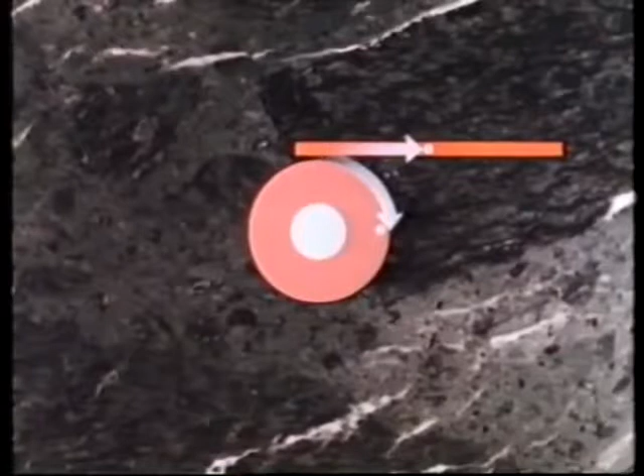Now, if the roller were allowed to move across the floor as the beam were pushed, the point marked on the beam would travel further in a left to right direction than before, by as much as the roller moved in the same direction.

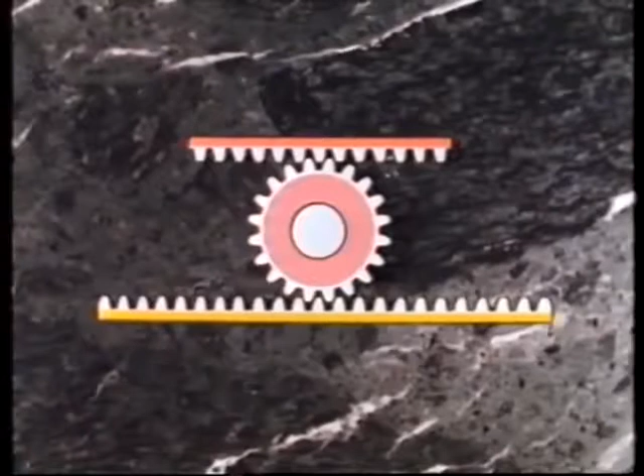As a first step in making this knowledge work for us, let us give the floor, the roller and the beam teeth to prevent them slipping. If this simple machine is then made to operate in a circle, we have the basis for a usable system of gears.

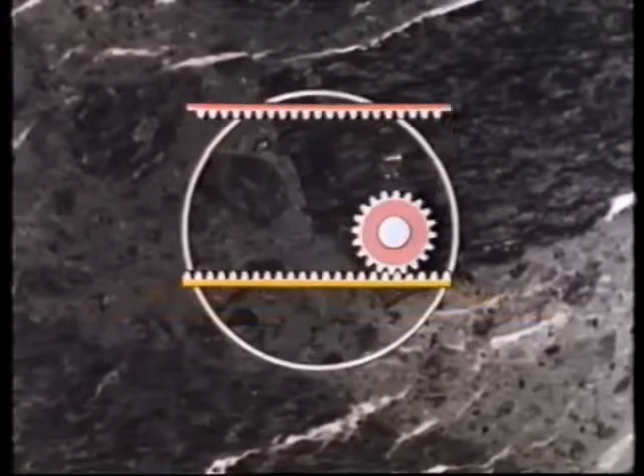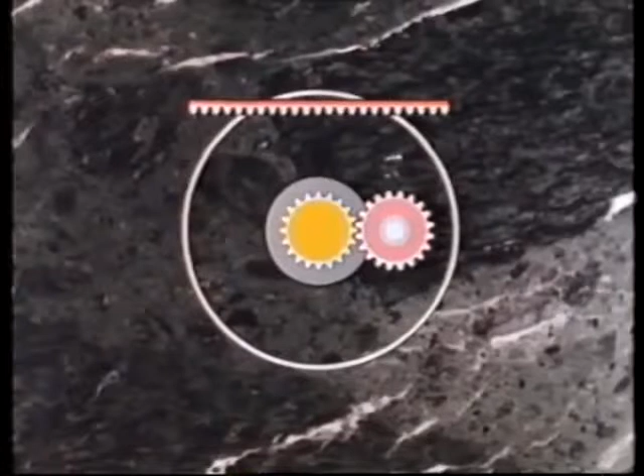We must start by naming the components of this system. The fixed floor has now become a fixed pinion, the sun pinion. Revolving round it, the roller becomes a planet pinion. It still has a pin through it which is fixed to and rotates with the planet cage. Finally, the beam becomes the gear ring.

If we apply power to the planet cage and move it through 90 degrees, the additional rotation of the planet pinion causes the gear ring to move further, in this instance an extra 30 degrees, making a total of 120 degrees. Conversely, if the gear ring is rotated 120 degrees, the planet cage moves the planet pinion through 90 degrees. In other words, our simple system of gears gives the ratio 120 to 90, or 4 to 3.

The Sturmey-Archer system applies this basic principle in a bicycle hub. Power is introduced via a sprocket, revolved of course by the chain. If the sprocket could be made to turn the planet cage, and the gear ring were connected to the hub, we would have high gear selected, with the hub rotating 4 times for every 3 rotations of the sprocket.

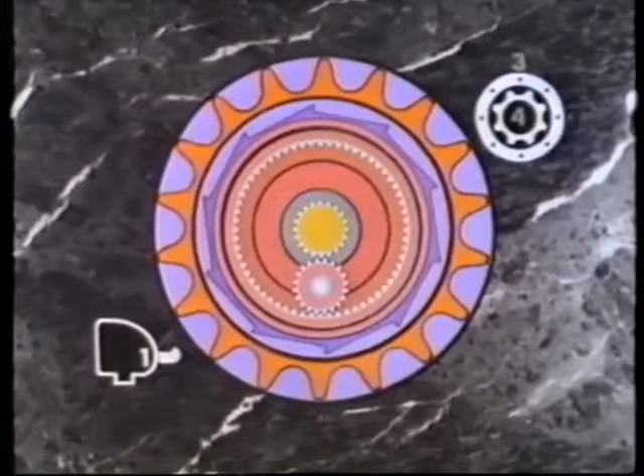If the sprocket were connected to the gear ring, and the planet cage turned the hub, we would have low gear, with the hub turning 3 times for every 4 rotations of the sprocket. And if the sprocket could be made to turn the hub directly without passing the power through both planet cage and gear ring, we would have normal or second gear. This is the basis for the 3-speed bicycle hub.

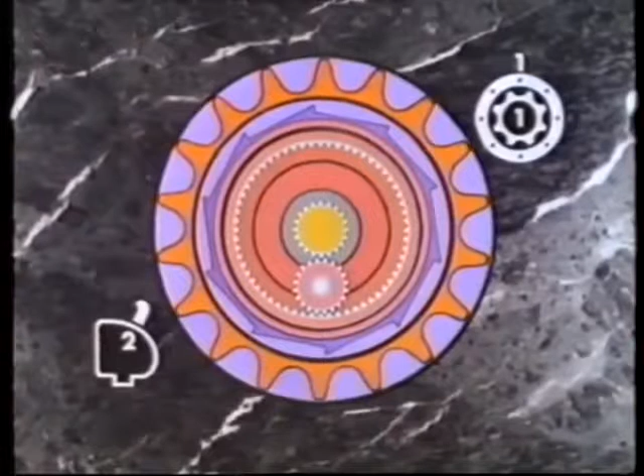In practice, of course, more components are needed to make a hub work effectively. Firstly, there are additional planet pinions attached to the planet cage, and the drive from the sprocket is transmitted via a cross-shaped clutch. Connection from the gear ring to the hub is made via pawls fixed to the ring. These engage with ratchet teeth on the inside of the hub shell. Likewise, the planet cage can be linked to the hub shell via pawls fixed to its outer surface.

In high gear, the clutch is allowed to engage with the planet pinion pins, giving a direct link from sprocket to planet cage. As the planet cage turns, the planet pinions rotate, turning the gear ring faster. The gear ring pawls, engaged with the hub ratchet teeth, then drive the hub. The planet cage pawls are overrun because the hub is moving faster than the planet cage to which they're attached.

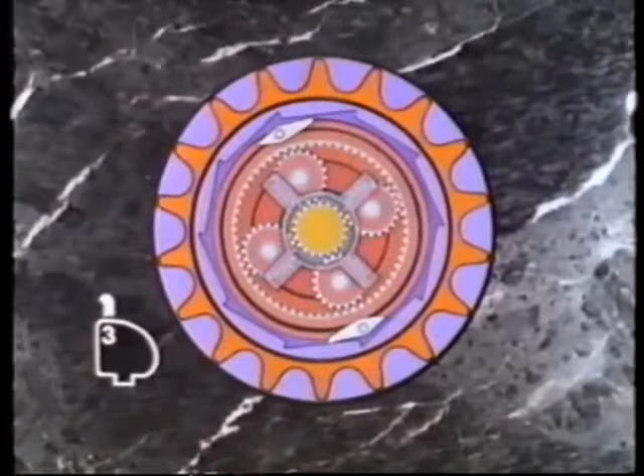In cutaway, the mechanism becomes clear. With the gear lever in position 3, the clutch spring is fully extended, pushing the clutch into the innermost position. The sprocket is attached to a driver which pushes against the clutch arms.

They in turn engage with the planet pinion pins, which are set into the planet cage, and therefore make it turn. As it does so, the planet pinions rotate about the sun pinion, and cause the gear ring to rotate at a faster speed than the planet cage. The gear ring pawls attached to the gear ring then locate in the hub ratchet teeth, and the drive is thus transferred to the hub itself.

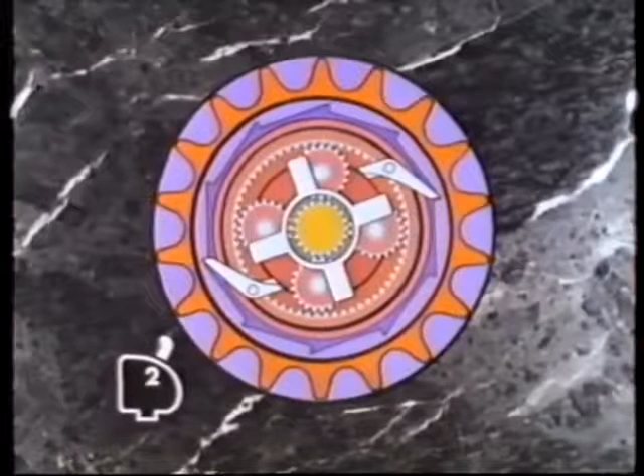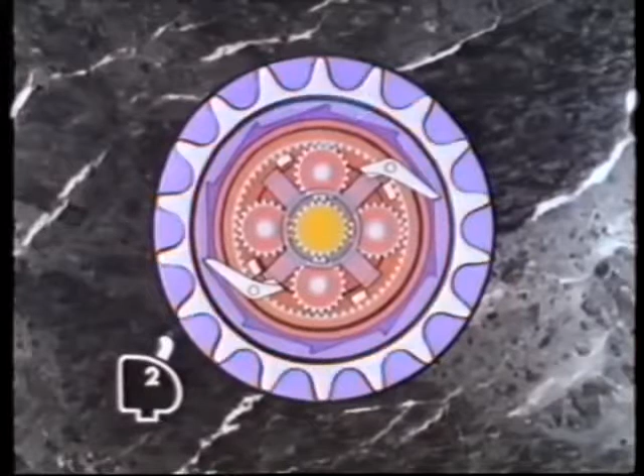By selecting position 2, normal gear or direct drive, altering the position of the clutch arms avoids the planet pinion pins when they rotate, but engages with the gear ring splines. This effectively transfers power directly from the sprocket via the gear ring pawls and hub shell ratchet teeth to the hub.

In cutaway, the drivetrain is evident, from the sprocket through the driver to the clutch, which is seen here in its intermediate position, to the gear ring splines and thence through the gear ring pawls and the hub shell ratchet teeth to the hub itself.

So in this case, the hub will rotate at the same speed as the sprocket, and as in the previous example, the planet cage pawls are overrun by the hub ratchet teeth because the hub is turning faster than the planet cage.

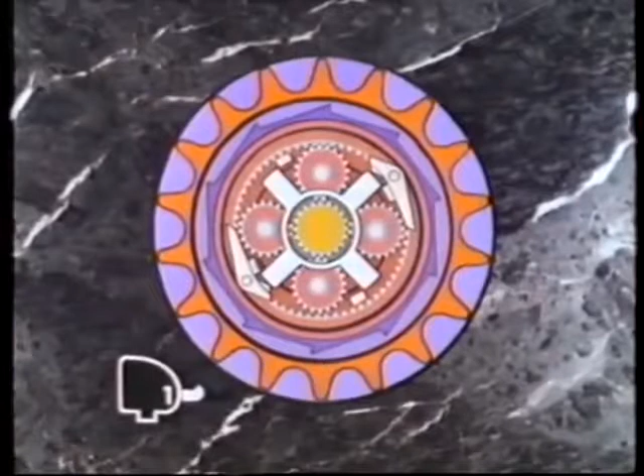In low gear with gear position 1 selected, the clutch still engages with the gear ring splines. This connects the sprocket to the gear ring, but the clutch is now positioned so that its arms also deflect the gear ring pawls and prevent them from engaging with the ratchet teeth on the hub.

As the gear ring turns, the planet pinions turn the planet cage at a slower rate. With the gear ring pawls deflected, the planet cage pawls can engage with the hub shell ratchet teeth and drive the hub.

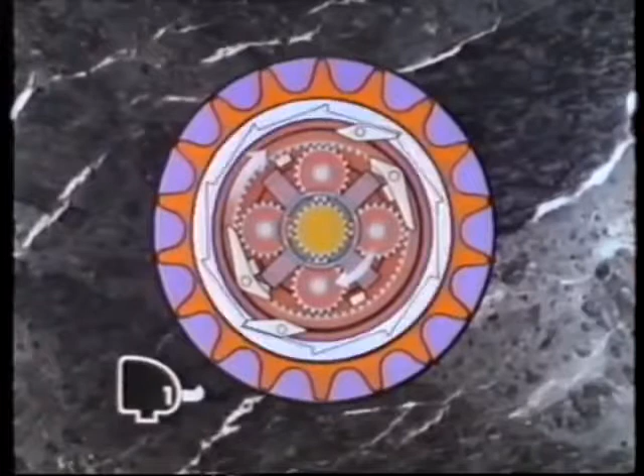In cutaway, the drivetrain can be seen passing from the sprocket through the driver to the clutch, which is in its outermost position. The clutch arms both deflect the gear ring pawls and engage with the gear ring splines to transfer the drive to the gear ring itself.

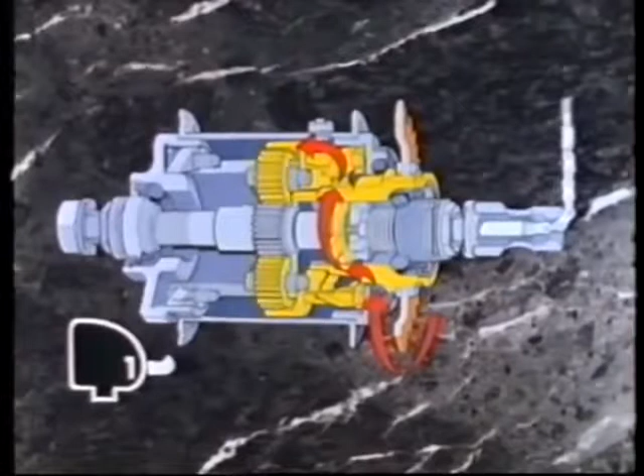From there, the planet pinions turn the planet cage and allow the planet cage pawls to engage the hub ratchet teeth.